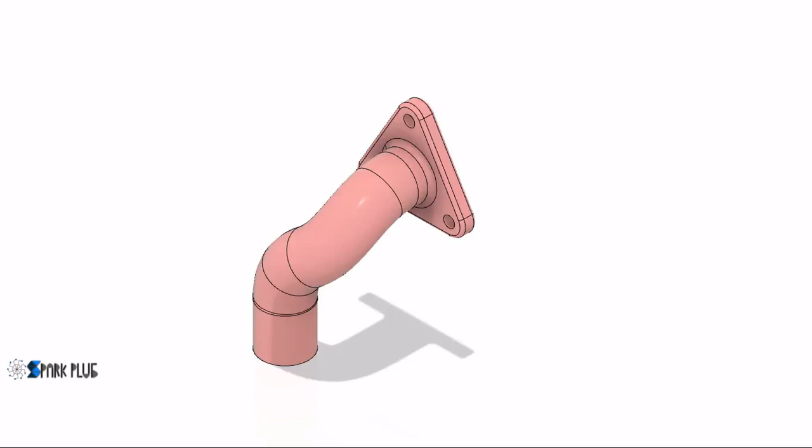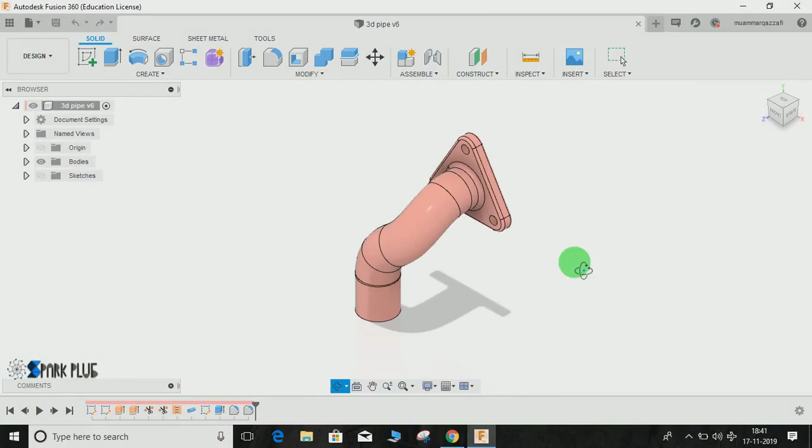In this video tutorial I'm going to show you how to make this hose pipe in Fusion 360, and here's the 2D drawing of it. You guys can find the downloadable link to this file in the description below, so don't forget to check that out. We got a front view and a side view, and some cut sections which represent the overall thickness of the pipe and the outer diameter of the pipe, and a cut section which represents the detail of the mounting on which this pipe is supposed to be mounted.

So basically the tricky part is not this triangular mounting. The tricky part is to make this pipe across all three axes at once.

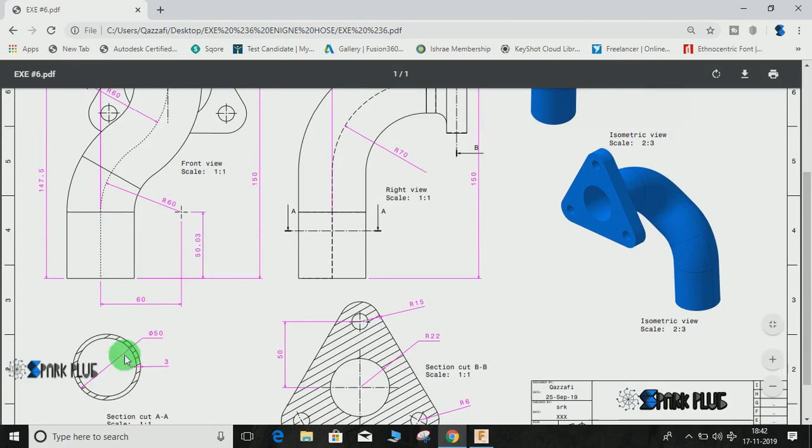So basically what I'm going to do is sketch this snake-like profile representing the front view, and then make the same thing on the side view, and then make a combination of these two sketches which will further be used to make a sweep, suppose the outer diameter is 50. So we are going to make a sweep on that profile. Sweep diameter would be 50 mm, and then we will deal with the thickness and this mounting kind of stuff. So what I'm going to do is make this profile on the front view.

We will start by making a straight line up to a distance of 50 as represented here, then an arc, and then another arc, and then a straight line up to this point. This is the center of the hole.

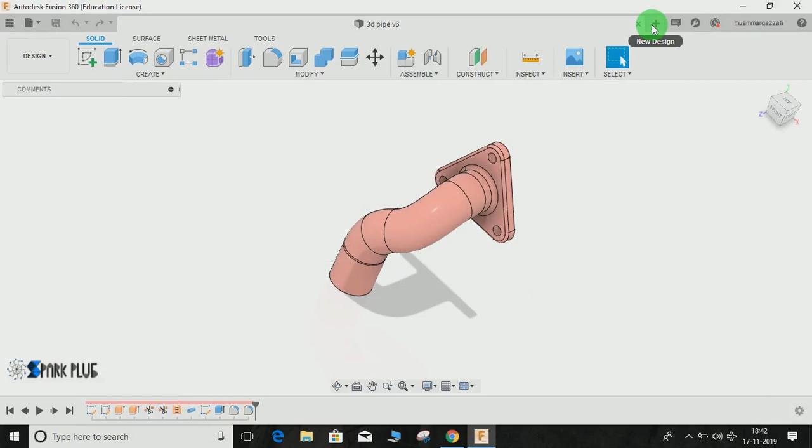So what I'm going to do is go back to the new design, click on create a sketch, and on the very front plane start making your sketch. Press L for line and draw a horizontal line of 50 mm dimension. You can give it a dimension of 50 mm and press enter.

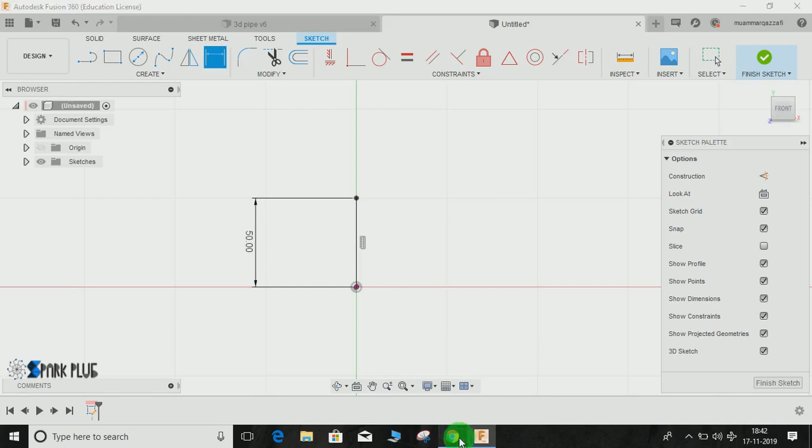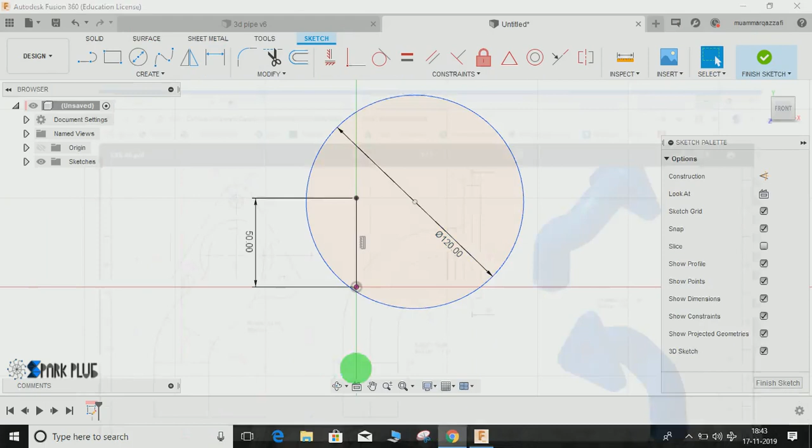Now the next step is to make this arc. The radius of this arc is 60 and the distance is 50 from the horizontal, and vertically its distance is 60 mm. So what I'm going to do is create a circle of diameter 120 mm which represents a radius of 60 mm as mentioned here, and the distance from the bottom of this point is 50, and here vertically is 60. So I'm going to shift it like this, press D for dimension, and from the origin give it a dimension of 50 mm, and from this give it a dimension of 60 mm like this.

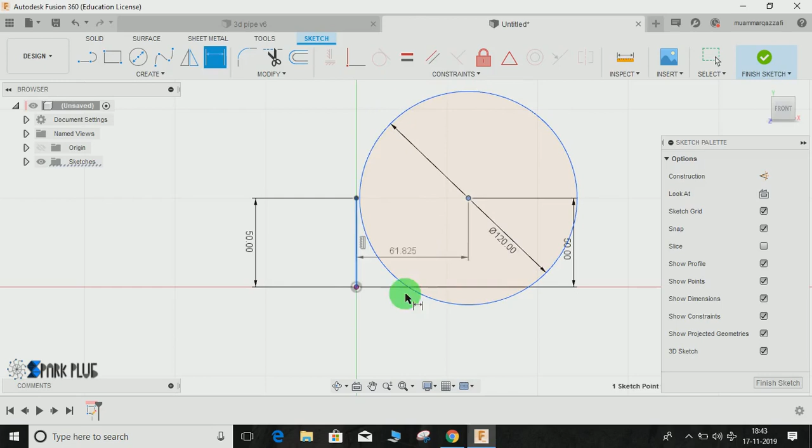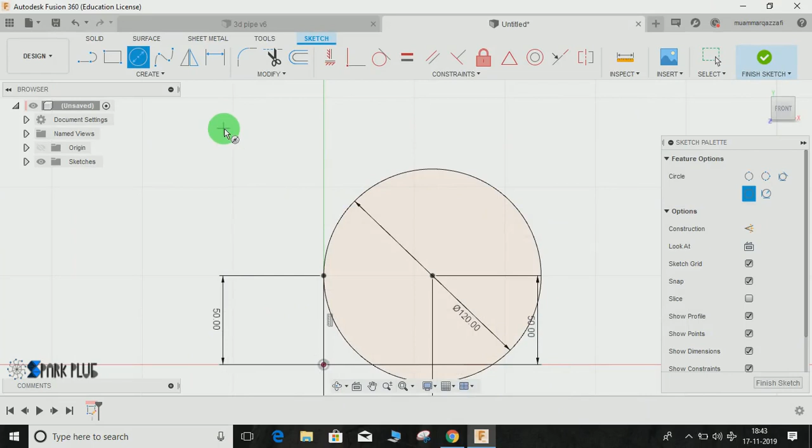Now I'm going to make another arc like this of radius 60. This time the distance would be 147.5 from the bottom, and towards the left the vertical distance would be 10 mm. So again press C for circle, draw a circle of 120 diameter and press enter. Press D and give it a dimension from the bottom of 147.5 and press enter, and vertically this distance from that point would be 10, like this.

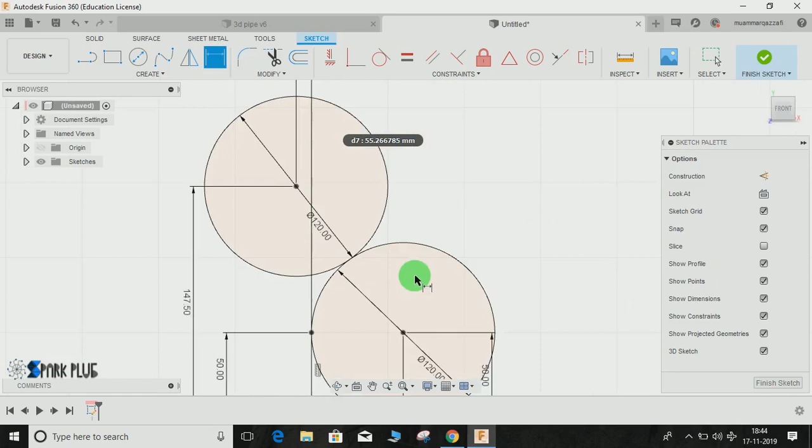So once done, the only thing left is to make this particular line. As you can see, the center distance from this point to the bottom is given as 150 mm. And of course the distance of this line from this line is given as 50 here.

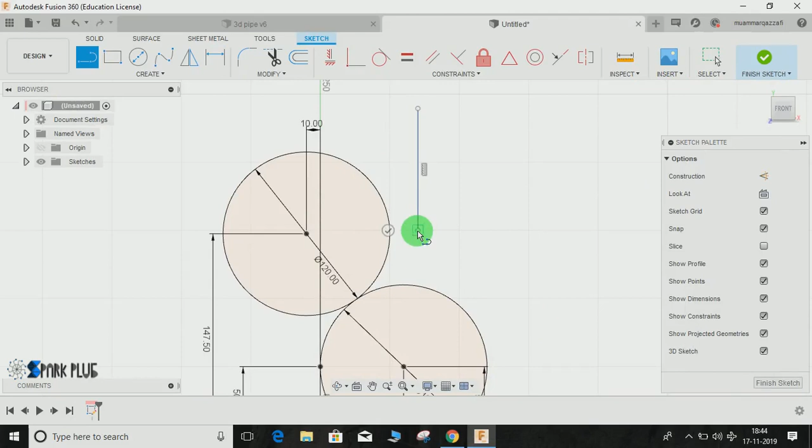What I'm going to do is press line and draw a line like this, and press D for dimension, select this line and the first line you have drawn, and give it a dimension of 50 mm as you can see, and press enter. Now the top point from this very point is given - the center point of this circle from the bottom is 150, so I'm going to make this 150 and press enter.

Just drag it down. Here is the line, just drag it down because we don't need it here.

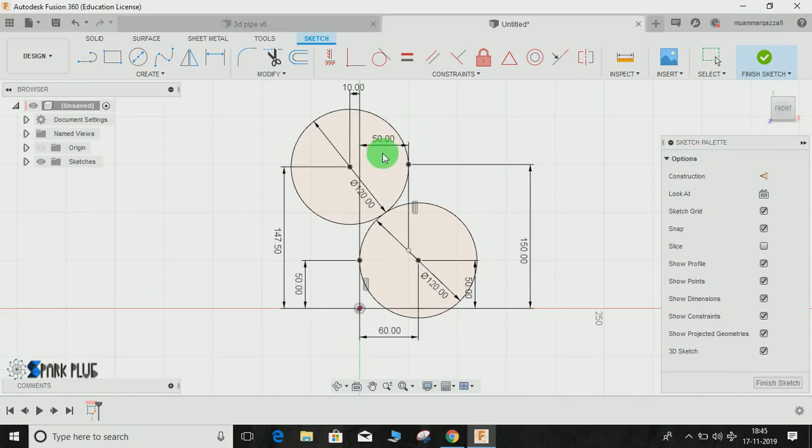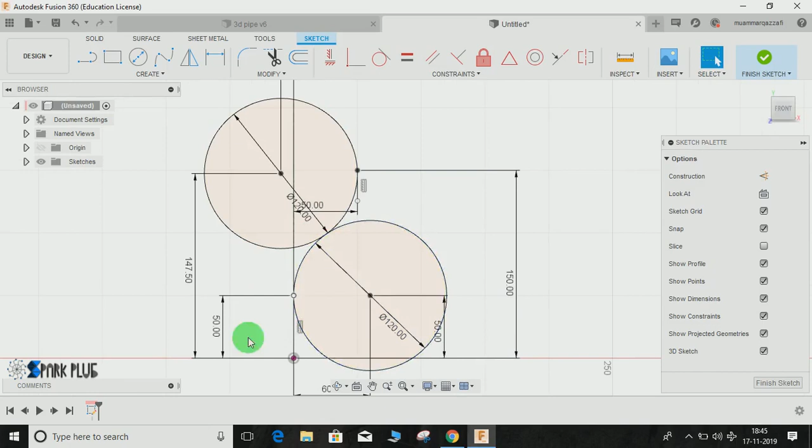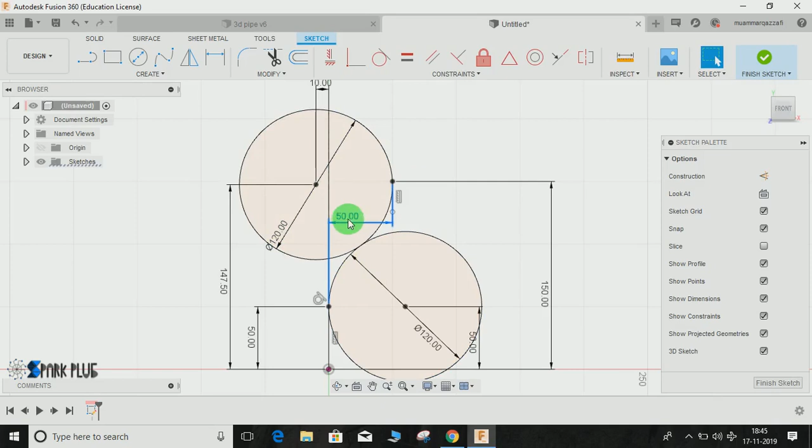Now what you have to do is, due to some mistakes in measurements at micron levels, we used to make tangent constraints between these components. So for that, suppose we just delete that 60 for now and give the tangent relation between this circle and this line. Click on this circle and this circle, but before that delete this tangent line, delete this 10 mm and press enter, and again click on this circle and this circle and make tangent relation. Again delete this 50 mm dimension also and give it a tangent relationship between this line and this line.

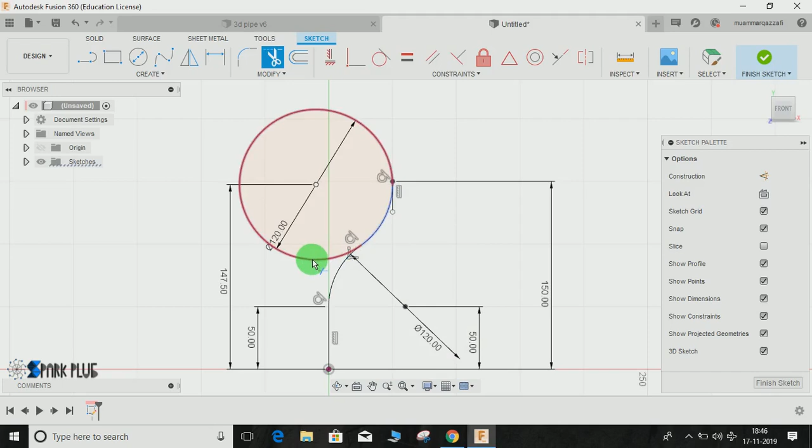Once done, press T for trim. Delete this excess part which we don't require, like this. A very small part of that line we have drawn will be left here, and press enter. Once done, all we have left is this curve width. Finish the sketch for now.

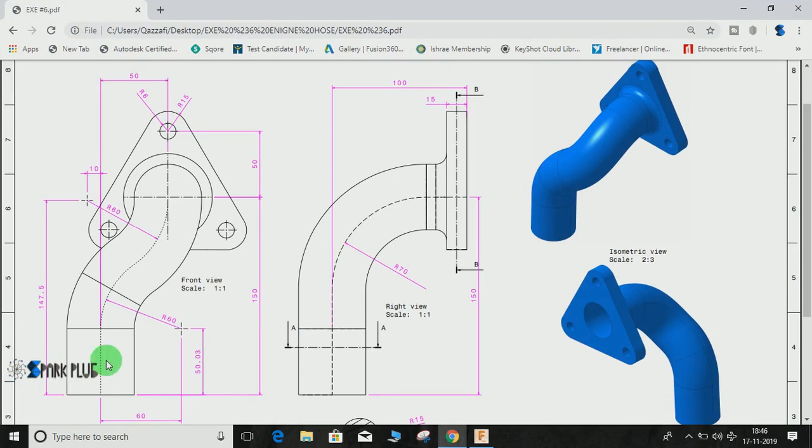Click on isometric view. Now once completed with the sketch, we are going to make this sketch on the side view. So for that, go to create a sketch and click the side plane.

Here's the sketch. Now what I'm going to do is make this dotted path. As you guys can see, this is basically an L with a radius of 70 mm at the center. So I'm going to make this L from the very bottom point up to a distance of 150, and the distance from here to here is 100 mm. So press L for line from this point to this point, and here's the L.

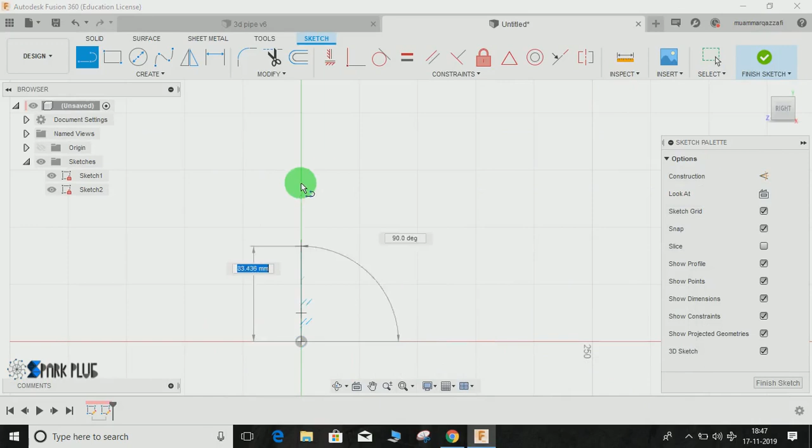So this is from this point to this point, the dimension would be 150.

This line would be of 100 mm, and this is 150, and the radius is R70. So press fillet, select this line, and give it a radius of 70 mm.

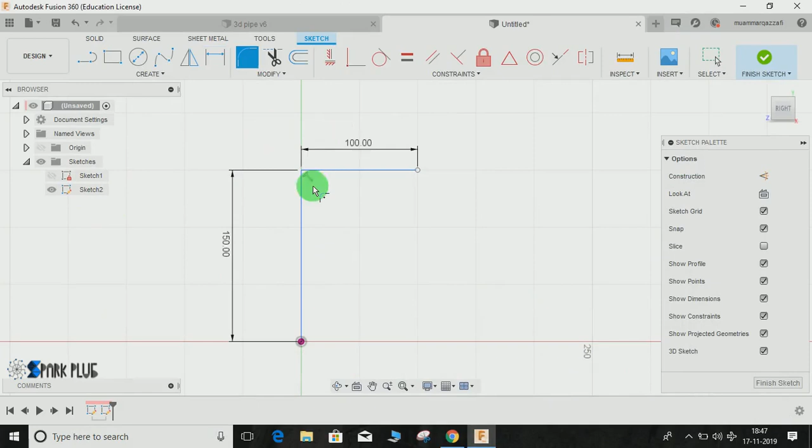Bring back the earlier sketch we have drawn and click finish sketch. Now I'm going to combine these two sketches to make a 3D sketch. If you're familiar with SolidWorks or CATIA, there's a command called combine sketch, which combines a two-dimensional sketch and creates a three-dimensional aspect with respect to that.

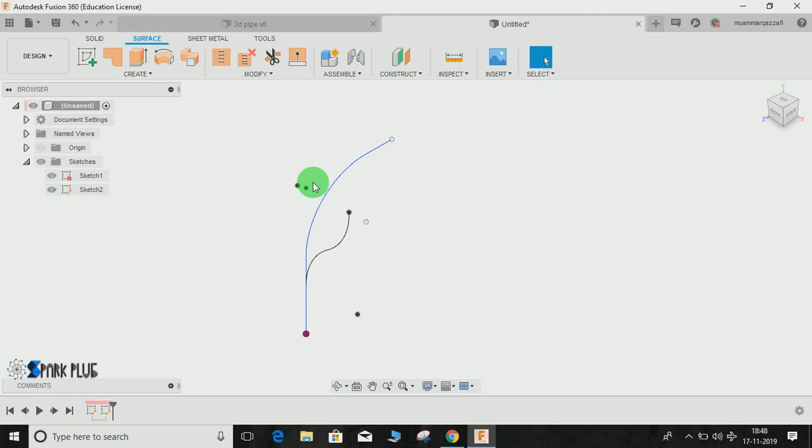But in Fusion we don't have such options, so this is basically my way of doing things. There might be other good ways, so please comment below if you have any. So switch off the first sketch, go to create extrude, and extrude the second sketch we've drawn. The distance would be symmetric, as a new body, dimension 45 mm would be okay, and press OK.

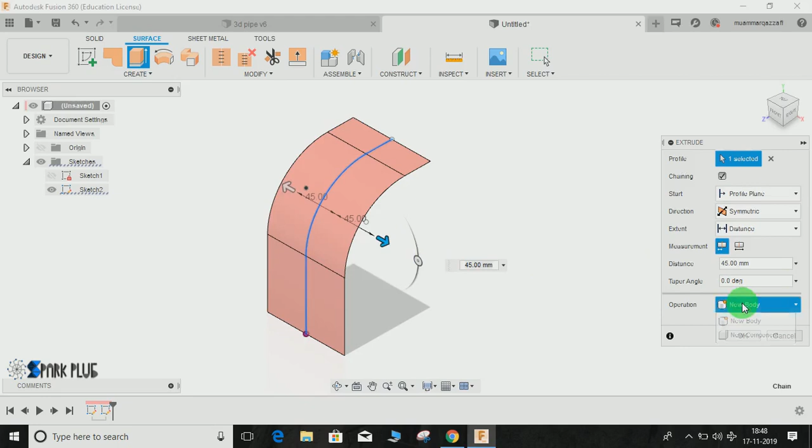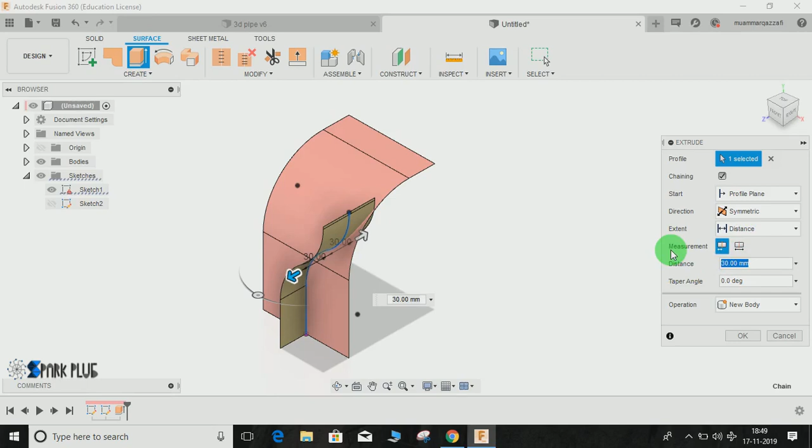Now bring back the first sketch and click extrude this line, and this time the distance would be symmetric, one-sided distance of 100 mm. The reason I'm making this 100 mm is because if you look closely, the distance from this bottom point to the outermost point is 100 mm.

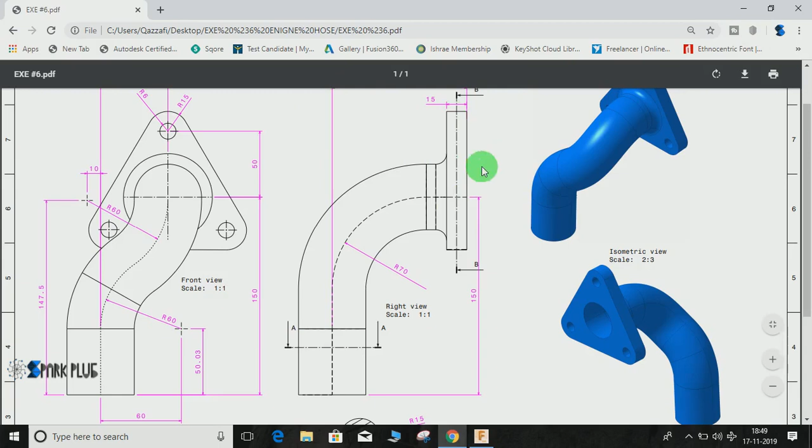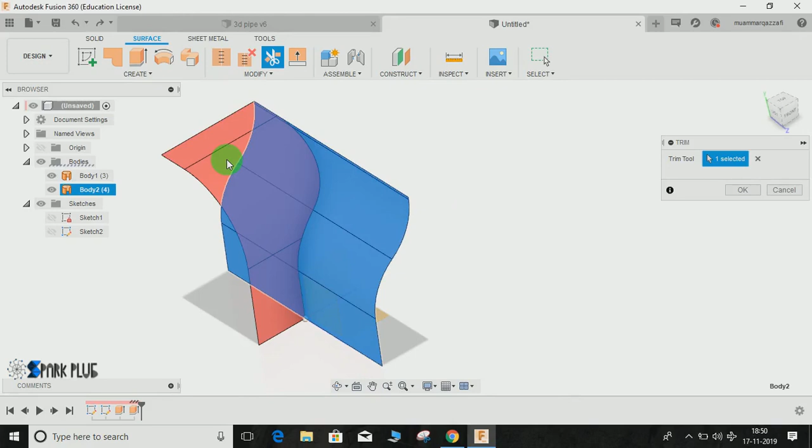That's why I'm taking this extrude up to a distance of 100 mm, so it doesn't get away from this point. Once done, I'm going to click the trim command, select the second extrusion of 100 mm both sides which you've drawn, then select the first extrusion which you've made, and press OK. This will trim the first extrusion with respect to the second extrusion. Let's hide the second extrusion, and here's what we got.

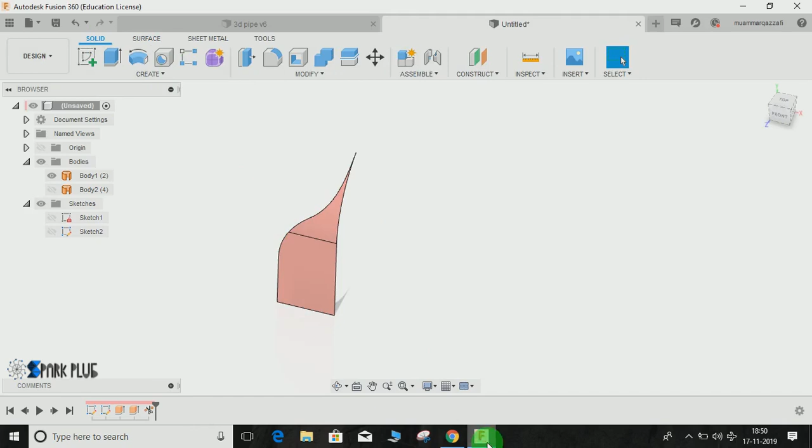Now again go to solid, and now we are going to make the pipe. There's another option, you can sweep the circular profile, or the simplest way is to make the pipe. It will ask you about the path, so don't forget to uncheck the chain selection. Select on this point, select all these lines up to...

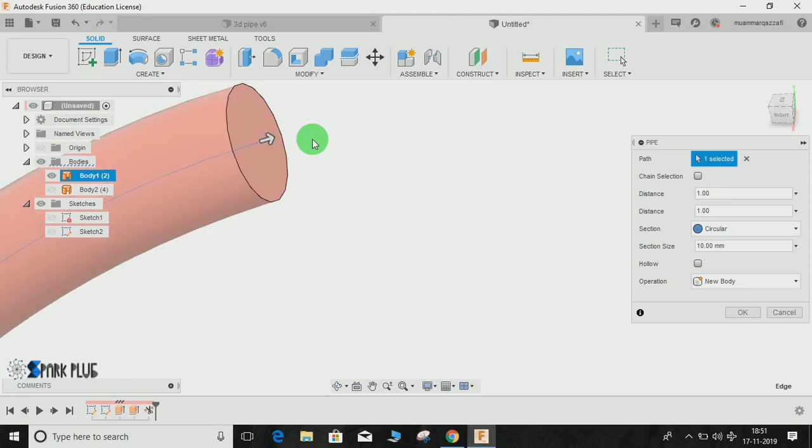One thing I've done wrong, so just cancel this for now. Now go to the first extrusion we have drawn, and just increase the length. We made this 50 mm, but I have to make this 100 mm also, like this, and press OK.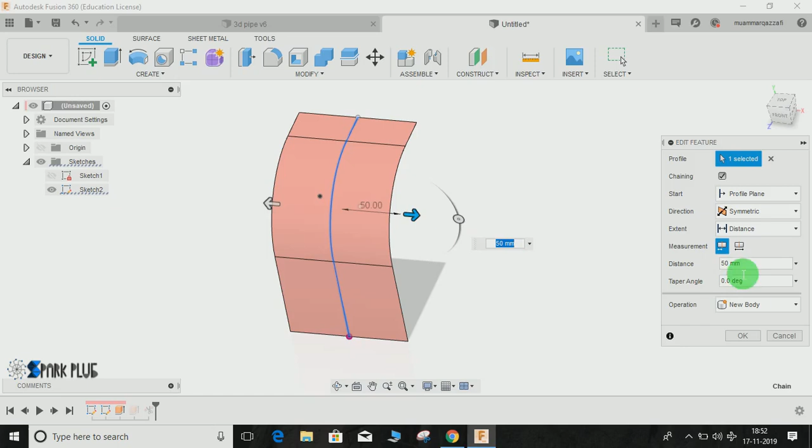Now you can see we have our complete sketch here. Basically I had miscalculated that 50 there. So now go to create, go to pipe, and select the chain, selecting all these lines like I'm doing here, to the very end like this.

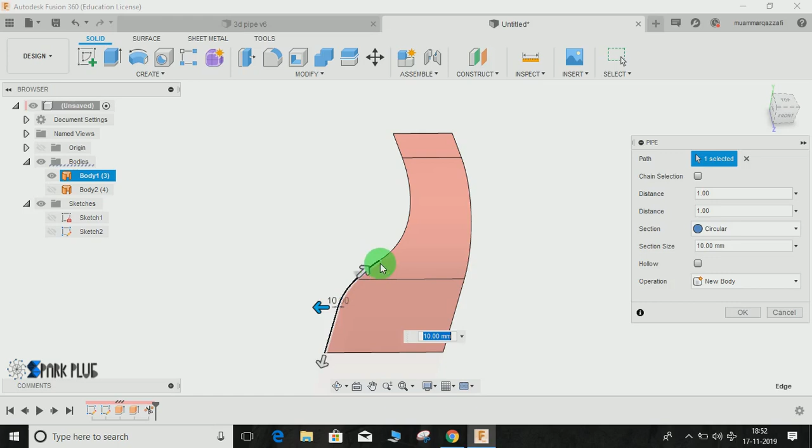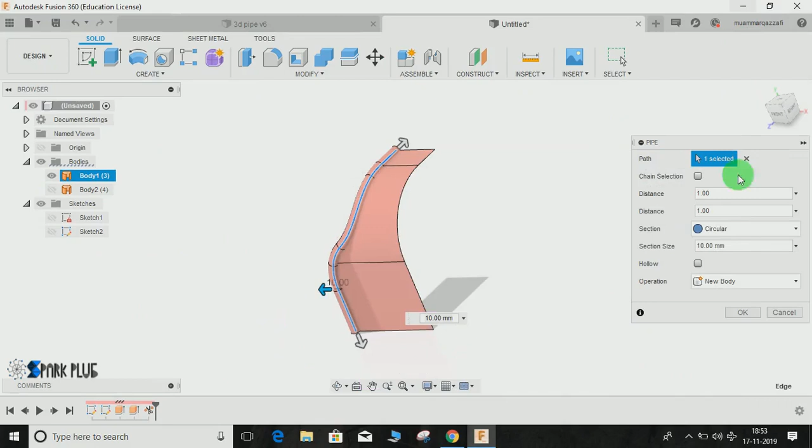Now it will ask about the section size. The section will be circular, and the section size is given here. The cut section at A: the outer diameter is 50 and thickness is 3. So the section size would be 50, select the hollow section, and the section thickness would be 3. This is going to be our new component, press OK and done.

Now we can switch off these faces body. Now we are going to make this profile on this very face. For that we need to draw these two circles like here. Click create sketch, select this front plane, and draw a circle from this center of 50. As you can see, the inner radius of this circle is 22.

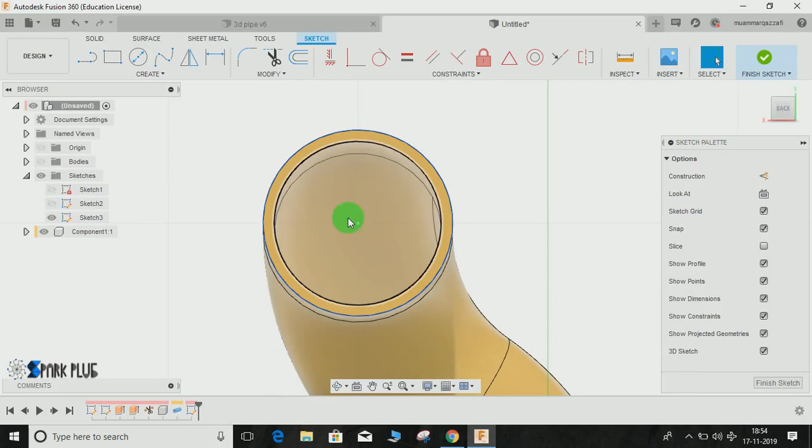So the outside diameter would be 44. Give it a dimension of 44 and press enter. Next thing is to make these three circles. The distance from the center point is 50 and the radius is 15.

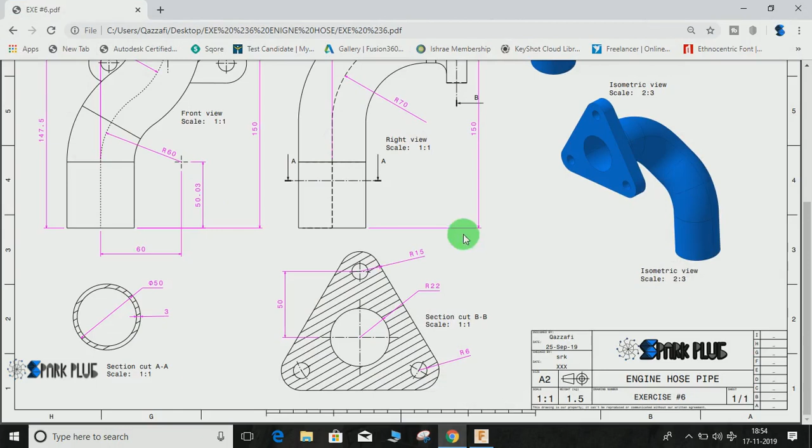So up to a vertical point, draw a radius of 30 diameter. No, actually the radius is given here - I took the outer one, so the inner would have a radius of 6, that means 12. So make another circle of radius 6, diameter 12, and from here to here give it a dimension of 50.

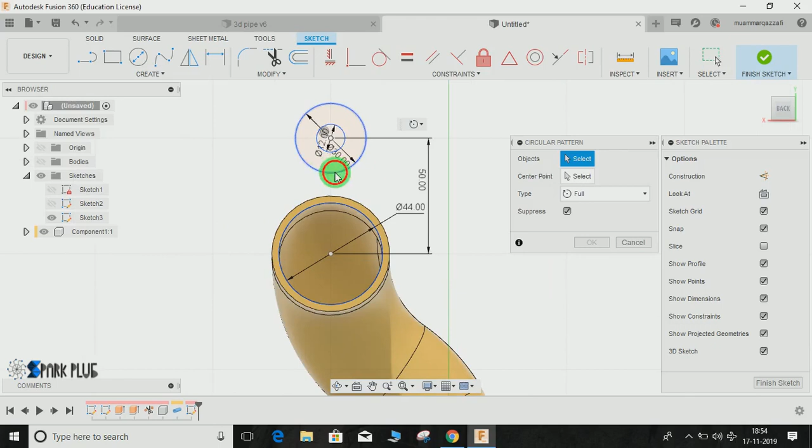Now go to create, go to circular pattern. The object would be the big circle and the smaller one, and the center point is going to be this. The quantity would be 3, and press OK.

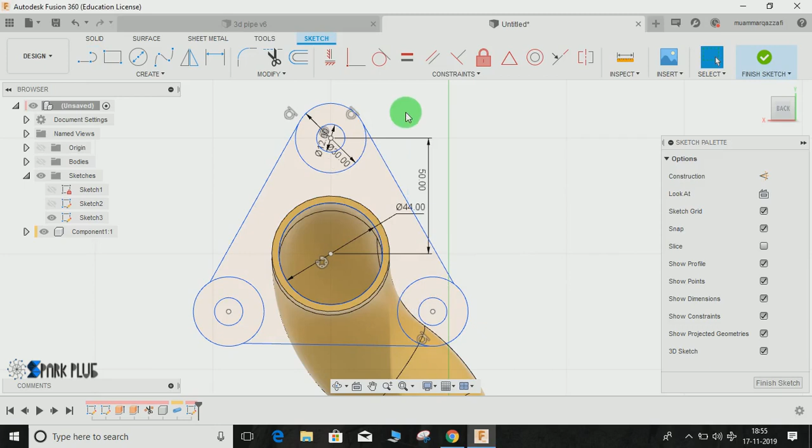Now click this first point, right click - no, it's actually fixed, so we don't have to do anything. Again press L for line and join all these points like this. Now all we need to do is give the tangent relationship between them. This is already tangent. Once done, click finish sketch.

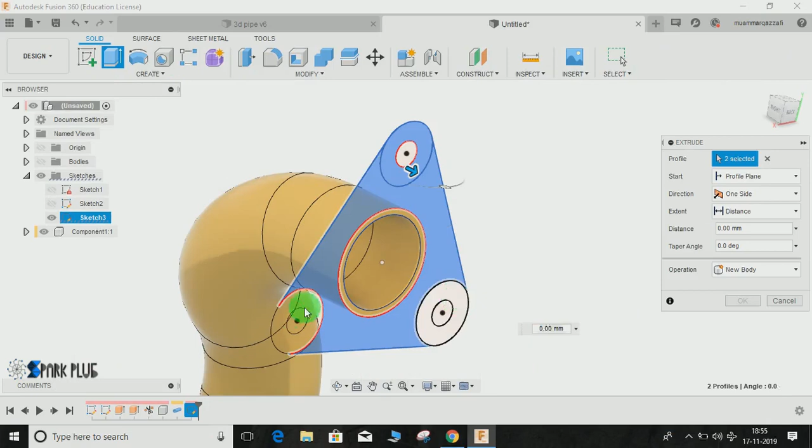As you can see, the thickness is given here, 15 towards the inner section. So again go to extrude, select this and this also, and the operation would be join, and the distance is going to be minus 15, and press OK.

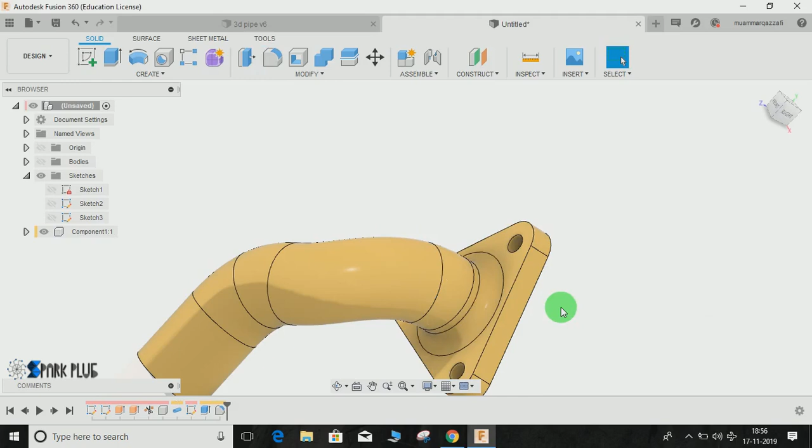Now press F for fillet and give here a fillet of 10, press enter. Now our exercise number 7 has been completed. This is how we make this hose pipe in Fusion 360.